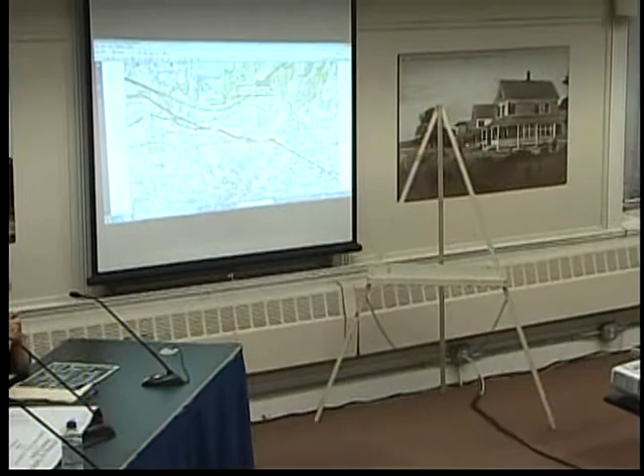Hi everyone, I'm Ross Morrow. I'll do a quick overview of what we have so far. We have this slide over here, as Dave mentioned. We start just before the existing median ends and the road comes together, 1.7 miles down past Red Brook Road.

Here's an overview, overlaid on an aerial, to help get yourself oriented.

We have proposed an all-new closed drainage system, with deep sump catch basins and, for the most part, reinforced concrete pipe. There is some ductile iron where pipes are shallow.

There are a few points in this roadway where either utility conflicts or tight invert elevations require the pipe to be shallow. Here's our first discharge point.

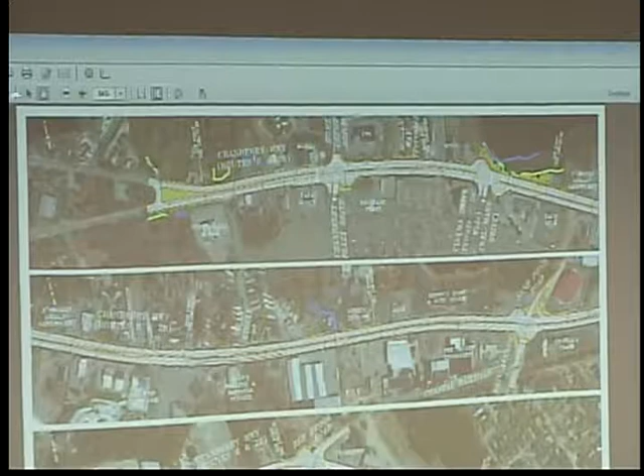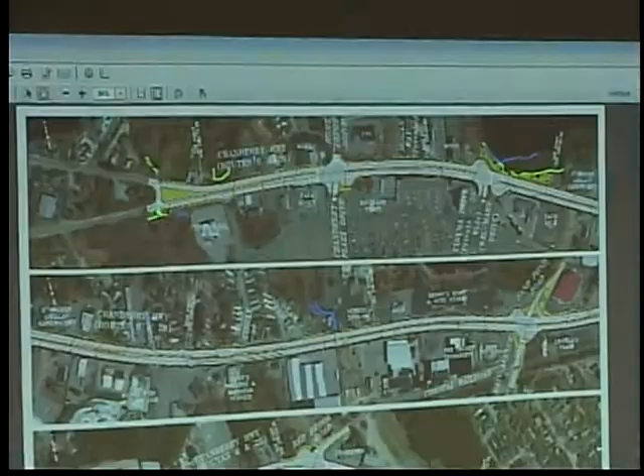We are meeting the same location as the existing outlet right now. Water coming down the hill towards our project is caught in catch basins and tied directly into the pipe that goes underneath the highway. Water coming from the east inside our project is caught in catch basins and put to the head wall that we'll be reconstructing as part of this project.

Around halfway between Home Depot and Cinema Drive is the high point, where you can see the closed drainage system heading down to discharge point 1, and in the other direction to the east, a closed drainage system heading to the BMP, our first BMP, right at Dick's Pond.

This will not only capture and treat water before it gets to the low point, but it'll also reduce the amount of water that gets to the low point where we have a known flooding issue right now.

This Dick's Pond outlet will be reconstructed. We are planning to raise the road by about a foot at the low point in order to get a better drainage elevation outlet.

Dick's Pond is about 6 1/4 as far as elevation goes, and the roadway we'll be raising to about 9 at the gutters, so there's not a lot of space there to get water through the pipes, but we'll be able to pick up a foot compared to the existing condition now.

This is a very small area here that does not go into one of these two BMP constructed wetlands.

As we move to the east, here's another constructed wetland. That'll pick up all the way from basically Waterwiz, which is the next high point. So all that drainage will come down to this constructed wetland. Next to that, Gene will get into a little more detail, but that's our wetland mitigation area.

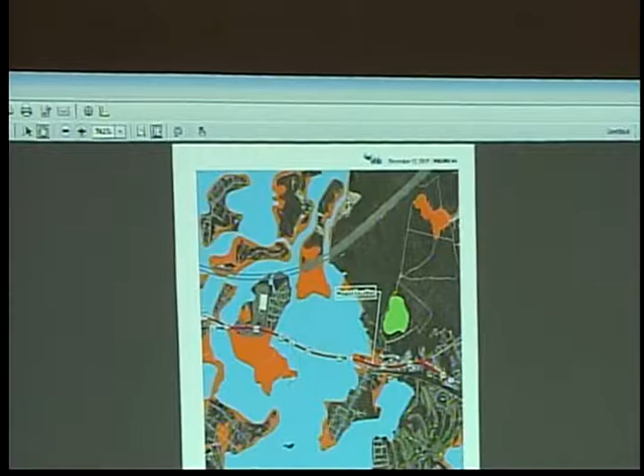So this is another view, a little bit larger. These orange areas represent the wetlands, the blue areas represent open water. So we've got three wetland areas, actually four wetland areas in this location, Dick's Pond, and adjacent wetlands associated with that.

Gibbs Brook, which is actually an outlet from Dick's Pond. Dick's Pond is kind of up in the back over here, and it drains out in this direction and out to Muddy Cove.

And then, as mentioned, we've got an outlet structure over here which goes into an existing natural depression on the side of the road. We're not proposing to alter that depression in any way. It's a very well vegetated basin currently, and provides tremendous storage and filtration the way it is now.

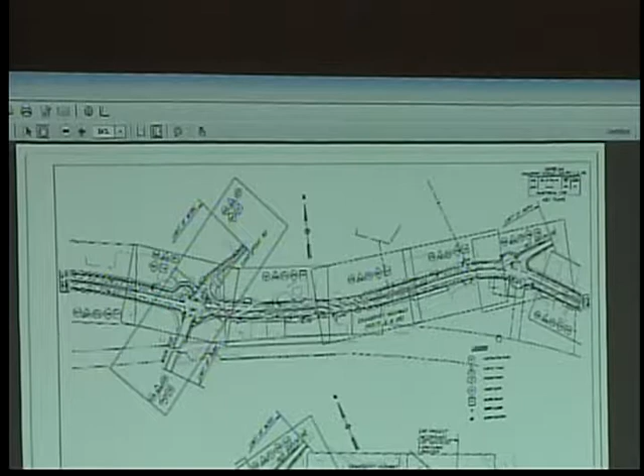These are the project plans, zooming into them, these are the wetland areas. Our work limits are here, and then from the road it's being either micro-milled for construction, or in some cases where there's sidewalks and so forth, it'll be a full depth reconstruction where the bed is reconstructed to support the new pavement. So we've got a stream coming through, as Ross mentioned, that comes through and out at this location.

There's an existing stormwater discharge at this location. We're going to be reconstructing that, so there'll be a new outlet in basically the same location to take on the outlet flow from the new catch basin system. There's a stream that comes in the median area. It ties into that pipe and then also outlets through here.

This is obviously in the area, but not being affected. We're not really touching any of these wetlands, so we'll have no impact on them. The next wetland down the road is this one we've identified as wetland 4. We're staying out of it.

This hatch material you see along the shoreline is like a riprap slope that will be constructed at 1.5 to 1 to keep the toe of the slope out of the wetland. So by putting stone in, we can have a very steep slope, and we can avoid having to impact the wetland.

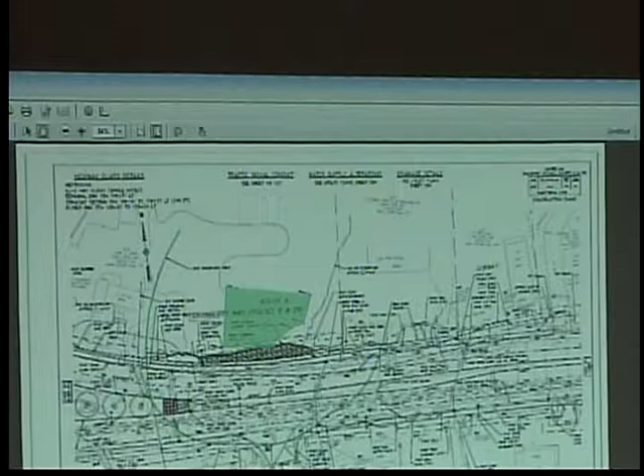Moving down, these are not, by the way, sequential. There are some sheets in between here that I'm skipping because there's really nothing, no wetland issues in those sections. This next one is the Dick's Pond area.

So here's Dick's Pond. The green represents wetlands around it. This is the detention basin, or constructed stormwater wetland Ross mentioned. So this will be receiving runoff, and the forebay is in this corner. It will then meander down, and there's an overflow in this location that discharges stormwater back to Dick's Pond.

This is where we're having some impact. We're going to be causing impact. I'm going to zoom in on this to make it a little bit easier to follow.

The edge of the road and the wetland boundary is right here. The edge of existing road is pretty much right here. We are right up against the edge of it in this location. Now bear in mind, a lot of what you see here that's going to be impacted is a Phragmites wetland. It's not a really high quality wetland. Nonetheless, it's a wetland, so we're showing that.

So this yellowish tinge area is what we would be impacting permanently. The existing outfall, which is about here, is going to be extended out to here. And as Ross mentioned, it'll be the outlet from that, which is a channel that is pretty occluded with vegetation. There'll be a little bit of dredging in this location, so it'll remain a wetland, but we have to open it up a little bit because the invert of the pipe is so low, it would almost be below grade. So we have to dig it out a little bit so that the water can actually exit the pipe.

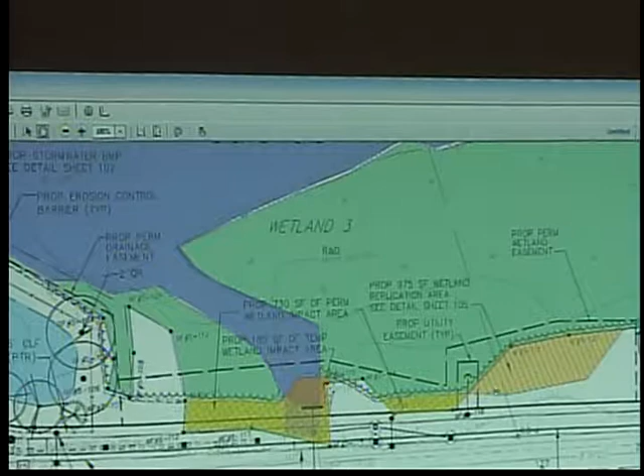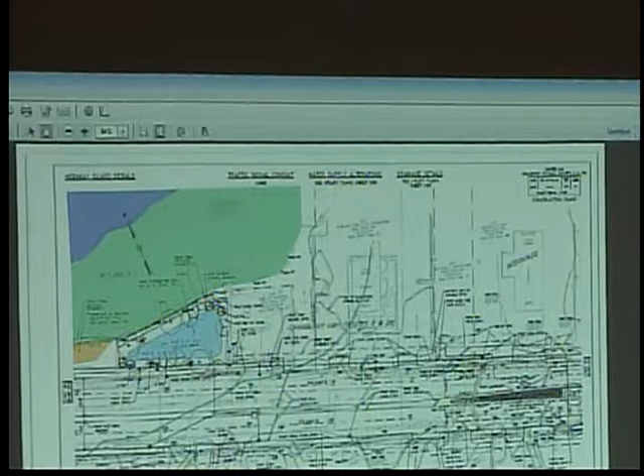The next sheet, which is again a couple of sheets down, this is Gibbs Brook as it exists. The pipe that carries it runs in this direction. As David mentioned, it goes underneath where we're going to be putting a new basin.

The reason the basin is configured this way is because of the depth of this existing pipe. We can't expose that pipe, so it's a little shallower here than there, so we can get over it in this location. The basin will have a forebay here, with flow coming in from this part of the drainage system, and another forebay here from this other part. They both come down together.

This is the outlet control structure, and that will dump into this new manhole that will be installed in the existing pipe that Ross mentioned. So that will be the outlet location going back into that existing drainage pipe.

Actually, it's conveying a stream. What we are going to be doing here, we're not altering the stream per se, but we are putting a new head wall in. Right now it's a kind of weirdly shaped head wall at the end of the pipe, with a trash rack on it that's not very formal—it seemed to me like somebody just stuck a rack in front of it. What this will be is a new, properly constructed head wall at the end of the pipe. The pipe isn't going to be replaced, it's basically just going to be put at the end of it. On the face of that will be a proper galvanized trash rack hanging on the front of the pipe, which can be taken off to be cleaned.

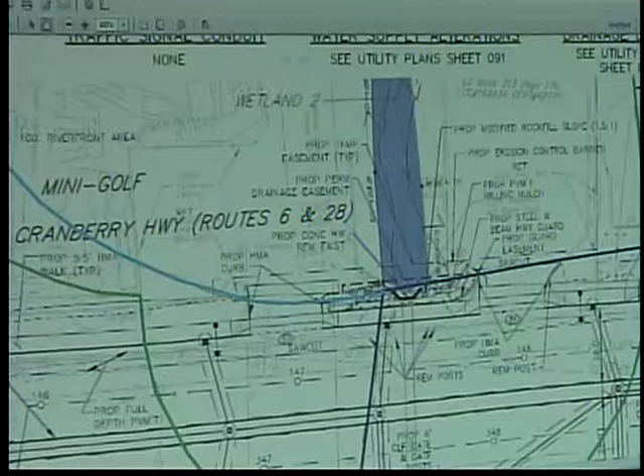Let me back up a little. The green lines are the 100-foot buffer zone, and the dark blue line is the riverfront line. So this is a little weird shape. This pipe is more than 200 feet long, so normally the riverfront line would truncate perpendicular to the end of the pipe. But this stream turns, and this is 200 feet from where that stream changes direction—that's why it has a funny shape.

And then the lighter blue, I threw this in—this is the 100-foot riverfront area, and then it becomes the same as the buffer zone on this side. So this work here is within the riverfront, all within the existing roadway, shoulders, or pavement along the edge of the road that currently exists. So it's pretty much all degraded riverfront that we'll be working in, and for the most part it would remain so when the project's done.

The benefit is that it does have a new drainage system that will be put in with new catch basins, deep sump catch basins, and a collection and treatment system that doesn't currently exist.

And then the last outfall location—this was an existing outfall. It drains off to the northern side of the project. It's a fairly large vegetated depression, mostly herbaceous growth—not grasses, but forbs and heavier stalk stuff. There's kind of a berm in the back with a notch in it, so it's actually functioning now to support stormwater; stormwater is being discharged to it. This is an existing outfall now, and we're just going to replace that outfall in the same location.

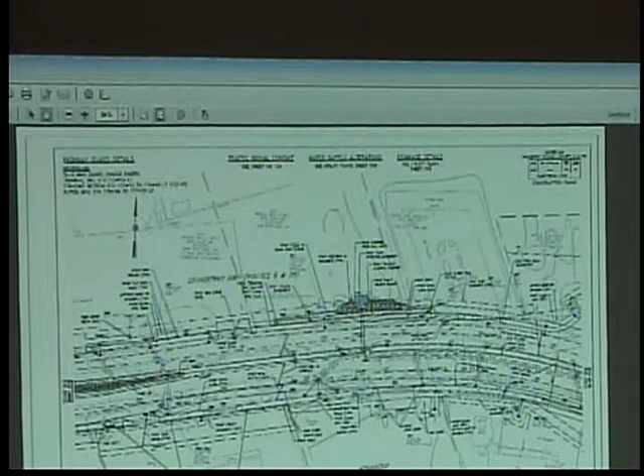Moving on, going back to the mitigation area, these are some of the sheets in the plan set that show the details for construction. This is the grading plan—I didn't color it, but this is the wetland boundary, so this is all wetland up here. We'll be grading this down to match the existing wetland elevation, over-dredging it a foot and then bringing back in a foot of wetland soils, and then planting it.

And we planted it fairly heavily as well. It's not a very large area, under 1,000 square feet, but we put a fair number of plants in there—more than I would normally do in a basin mitigation area. Since it was so small, it warranted maybe 10 plants, but that seemed a little too sparse, so we put quite a few more in.

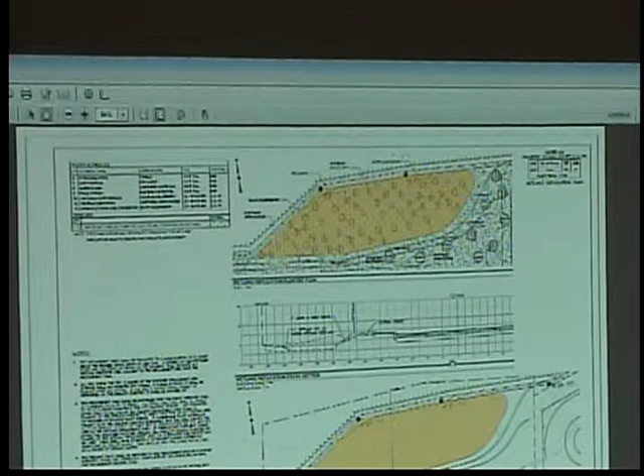These next three shots are blow-ups, detail views of the detention basins. As I mentioned, there's a forebay to the west of Dick's Pond. Dick's Pond is over here. This is the forebay where the discharge would occur, the water would meander down, and then overflow out to Dick's Pond.

This shows you a cross-section of the basin. It's got the deep water area for the inlet, then shallow marsh and deep marsh configurations throughout. Different kinds of plants go into each area that can handle deeper water conditions and shallower water conditions. Basically what we're doing is creating a marsh here.

But it's a special kind of marsh, designed to treat stormwater rather than be mitigation. We've been doing a lot of these types of designs lately because they function very well. In this case it works very well because we're very close to groundwater. If we created an extended detention basin, you wouldn't want those to have water in it because you want them to drain down. But we're so close that when we grade this down, we're going to be in groundwater, so it's never going to drain out. So we figured, let's make use of that groundwater and turn it into a constructed wetland. It'll function better.

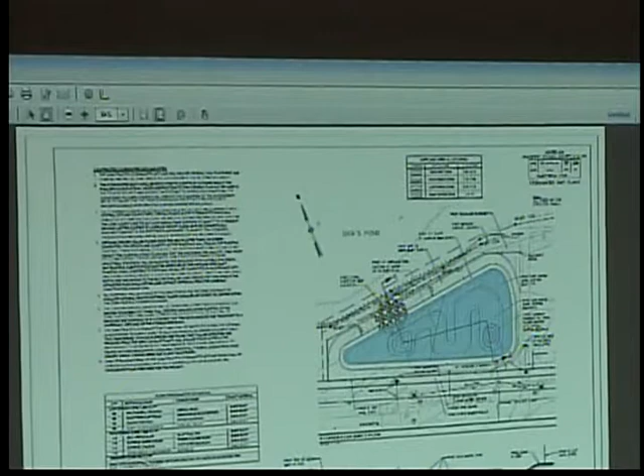Again, this is a cross-section showing the configuration, and that profile follows this line. It's kind of a squiggly little line, but what it does is get you through, so you can see the undulations and the changes in the grade.

This is the larger basin. This is the pipe conveying Gibbs Brook underneath it, which goes through the basin. Water will be coming in on this side into one forebay, and on this side into the other forebay. They come together, and the outlet control structure is this square here. That will be piped into that new manhole, into the outlet pipe, or into the stream pipe.

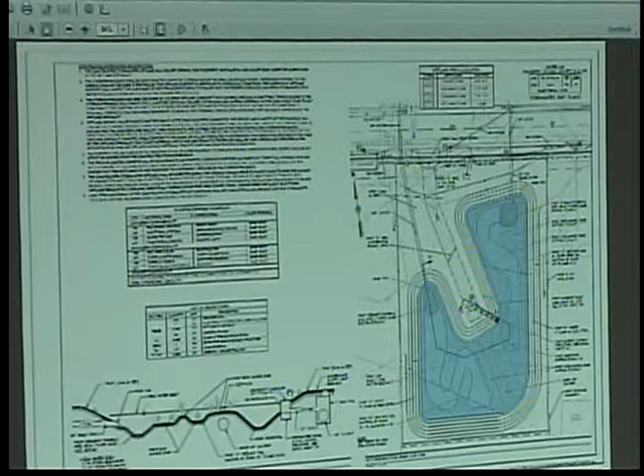And again, this is the cross-section that looks like this, and this is essentially what it would look like, and here's the outlet control structure. There'll be a low-flow invert, and then the whole top will be graded for an overflow, and that will tie into the pipe, which is the existing pipe. And that's pretty much it. Happy to answer any questions.

Jim, you got any more, David? I don't have any more questions. Sandy? Come back to me, please. Joe? The only concern I got is the engineering right up there, because you're going to have much more impervious surfaces, so is the drainage definitely going to be able to handle this?

Yes, obviously the drainage design and the basins were designed with the additional impervious area in consideration. I know a lot of this stuff is going to just replace stuff that's already impervious, but there's going to be some ground covered up too. There is a bit, because we're adding sidewalks on both sides, so there's going to be a little more impervious. It's not necessarily roadway, but it's still impervious nonetheless.

Overall, project-wide, there's an increase of about 2.26 acres of pavement, in addition to the 15.9 acres already there. So the total will be about 18 point... I just want to make sure you figured in for that extra, because that is a difficult stretch of road there. Yep, it is. It's a wide road. Yes, it is. All right, I don't have any more questions right now.

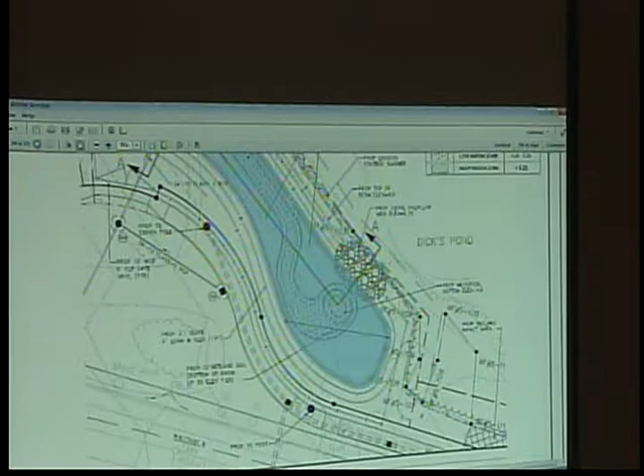So there'll be nothing inside it? Even inside the basin is going to be planted, not just whatever grows up. This landscape planting and seeding schedule is here.

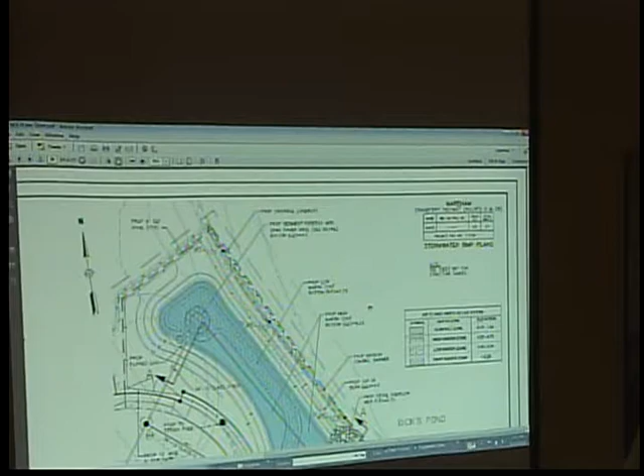What page is that on? This is on sheet 102, in the details section. Each one of the basins has a plant and seed schedule down on the sheet somewhere. You can see we're going to be placing arrow arum, arrowhead, and pickerel weed.

These are all aquatic plants. They're herbaceous, not shrubs or trees, but they can withstand 6 to 18 inches of water, which is why they were selected for these locations. The expectation is that they're going to have that kind of water depth in there.

I'm pleased to see you used blue flag as opposed to yellow flag iris, which is invasive. Are any of these on the possible invasive line? Were you surprised I knew yellow flag was invasive? I do water gardens, so I know. We would not use yellow flag. Wait a minute, there was something else, bear with me.

The other thing I think, if you do water gardens, a lot of these have flowers, and they're actually very attractive when they're flowering, for their short period. But I think they're great plants myself.

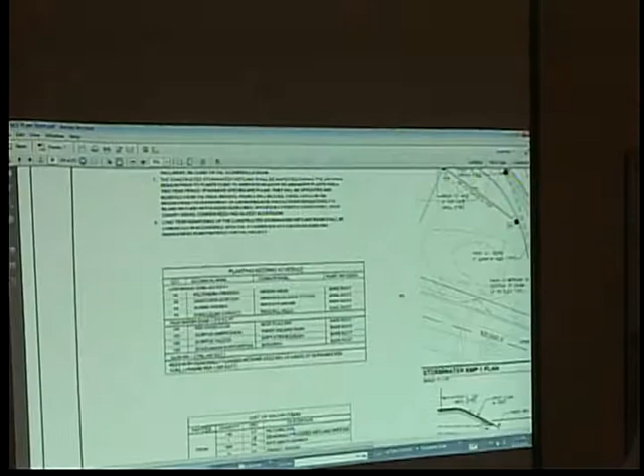Now, you mentioned a trash rack will be placed at the input from Gibbs Brook. How often would that be removed and cleaned? I defer to David, because it's cleaned at the beginning of the fish run. Prior to the herring run season, the herring officers typically will go by and make sure that's cleared. So it's not necessarily up to the town to do it? It's not up to the town, but they do it in the interest of the herring run.

I was going to make a comment about that once you're done. I'm almost done. Now, how much dewatering will you need to account for as you move across the flatter area between Burger King and Water Wizz? Do you expect any dewatering issues, going low enough for the sidewalks to have an issue with water?

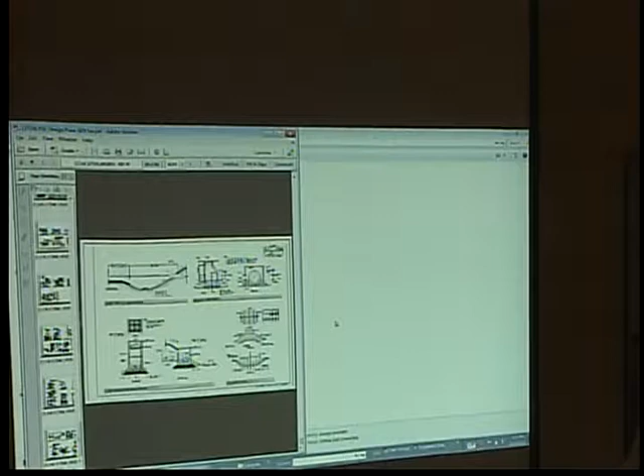I would expect some dewatering to happen when we're doing our trenching for the pipes, not for the sidewalks. For the stormwater pipes, yes. How deep will they go? It's in the plans, I didn't read it. In that area we're trying to keep them relatively shallow, not deep at the Dix Pond outlet, but in general we have about 4 feet, so probably a 5-foot deep trench.

If we run into a little bit of water, the bedding material changes, we use either crushed stone or something that can be compacted in the water. If you start getting a trench full of water, you have to put a pump in there and get it out, so there will be accommodation to handle the dewatering pump out when needed.

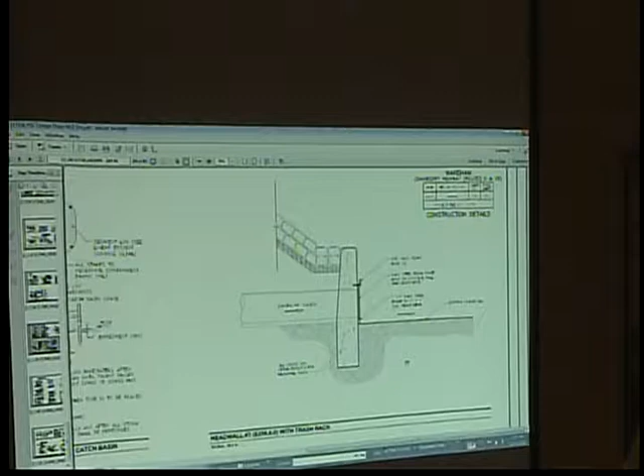We have a full list of hazardous material type items in the contract, which includes treatment of water if they find contaminated environments. There's also standard dewatering in the contract, and that has to be treated appropriately. They can't just dump it in the Dix Pond. That's all written into the contract.

Now, we do have oversight within the 200-foot riverfront, correct? I'm concerned about some of the plantings that are going to be placed on the median strip on the road, which is within our purview.

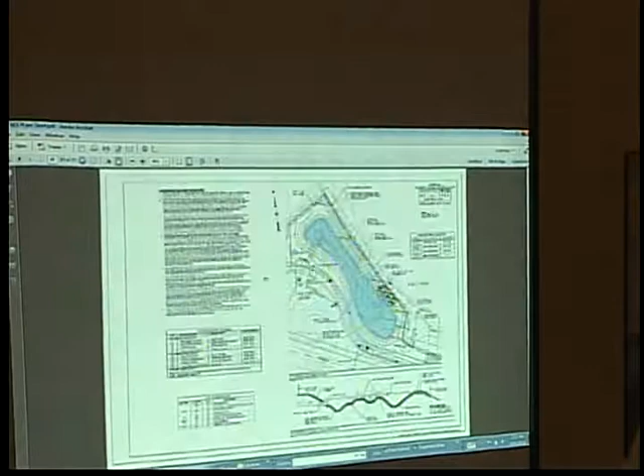I mentioned this at the public meeting the other night, and I'll mention it now. I'm very concerned about the planting of trees. They're shade trees, they will grow big, they will have broken limbs, the leaves come down since they're deciduous, meaning more debris on the road. And when you have grasses, they need to be cut in the spring to maintain them. You have daylilies that need to be maintained at least twice a year to look good. I was just wondering what type of maintenance plan will be available for that median planting.

Am I out of line? No? Just a real quick beginning response, and I'll let Mike or Ross take the rest of that.

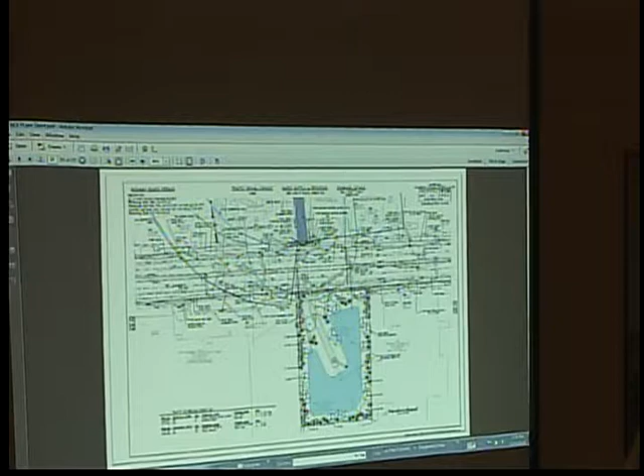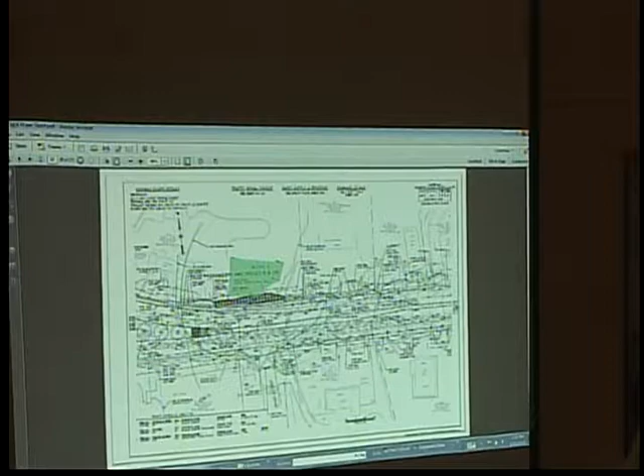In the riverfront area, shown by this blue line, there really isn't any landscaping. The median there is too narrow to be landscaped. Further up, it won't be landscaped either. There will be landscaping shown in some areas of the median, certainly at the triangle at the beginning, and in a couple of areas where the median widened out a little, making it sensible to put something there. But there have been other thoughts on that now. They're going to be investigating it and determining whether or not they'll actually put any landscaping in the median.

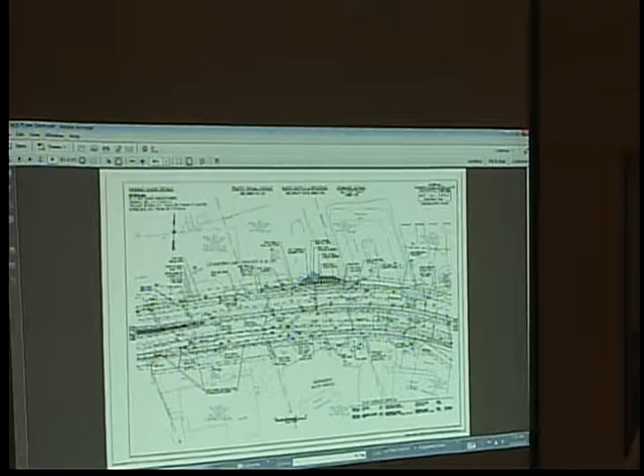As I said at the public meeting, I was very concerned about the catching of trash. It wouldn't take much for that planting of grass and daylilies to collect discarded materials, and how often are they picked up? I'm sure you don't want a maintenance vehicle stopping traffic for all the hours it will take to remove the litter and maintain the plants there. I know it's not a concern of conservation, but I thought I'd repeat myself.

Understandable. I believe our district maintenance force is handling this, and we're going to be making some recommendations, from my understanding. The maintenance force is somewhat concerned about maintaining it as well.

I think that does it for me. Okay, David, you still got comment?

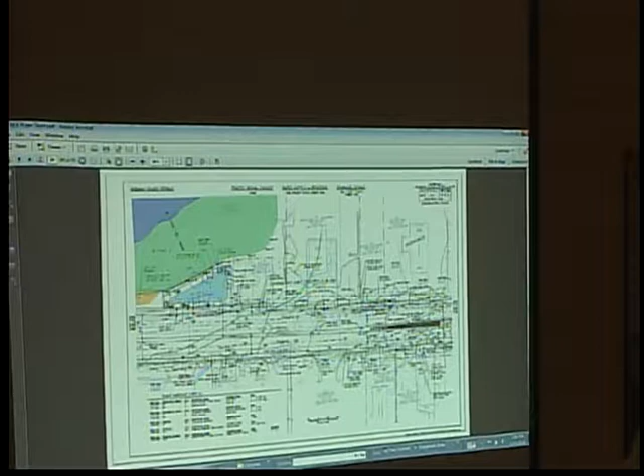Yeah, I just had a comment relative to the ongoing maintenance of the stormwater structures. In the notice of intent, there's some language about ongoing maintenance for the stormwater structures, and typically we would put those sorts of features into the order of conditions so that it's reiterated that those things actually have to happen and get done.

So you're talking about annual maintenance for most or all of the structures. My question is, is it Mass Highway that's going to conduct that work? That would be correct. We've, across the state, developed this impaired waters program with a number of BMPs that we pull out of our toolbox to use.

All those BMPs do have some maintenance, so we're aware of that, and that's currently being programmed into our future needs. These systems are all going to be located via GPS, so we can track where they are and when maintenance was done. Our crews will be able to do their maintenance and update a tracking system that confirms it's been done, and we can produce a report showing that these BMPs have been maintained.